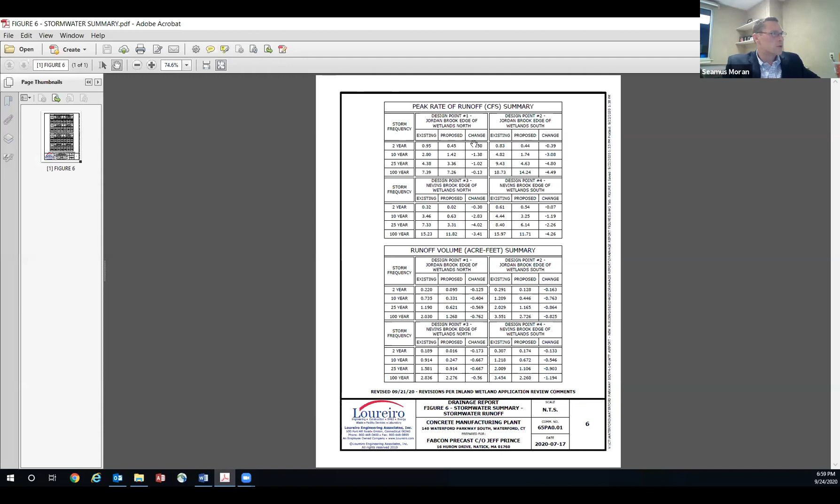All right, so I'm going to share my larger screen, so I will not be looking directly at the camera. Hopefully you guys can hear me and see me. So I'll share my screen now. Everybody see my screen, with hopefully the peak rates on it? Yep, okay. Again, it's just a summary. I probably mentioned this a month and a half ago. I just want to bring it to everybody's attention again.

So these are design point 1, design point 2, design point 3, and design point 4. Design point 1 is the Jordan Brook edge of wetlands on the north half of the site. Design point 2 is Jordan Brook edge of wetlands on the south half of the site. So design point 1 is at the midpoint of Jordan Brook. Design point 2 is at the southern end of Jordan Brook. So these numbers, as you can see, existing and proposed.

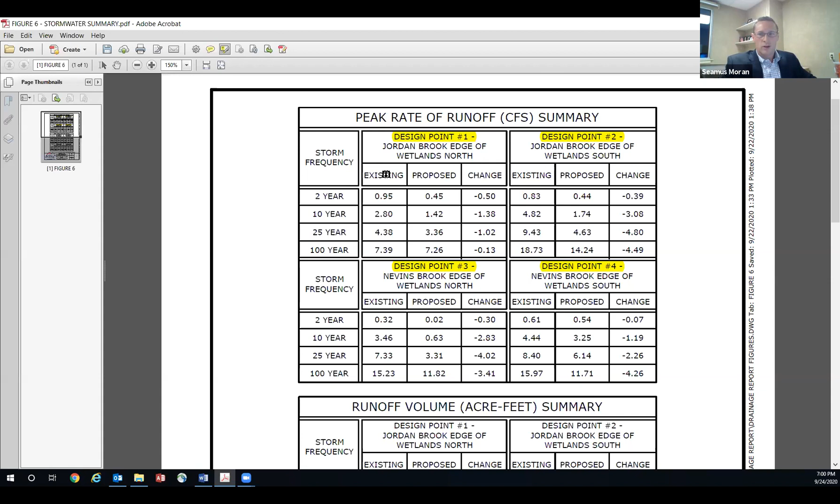I'm sorry? Double doors. It was like a backdraft move. This huge cloud. I'm sorry, I didn't catch that. Was that for me?

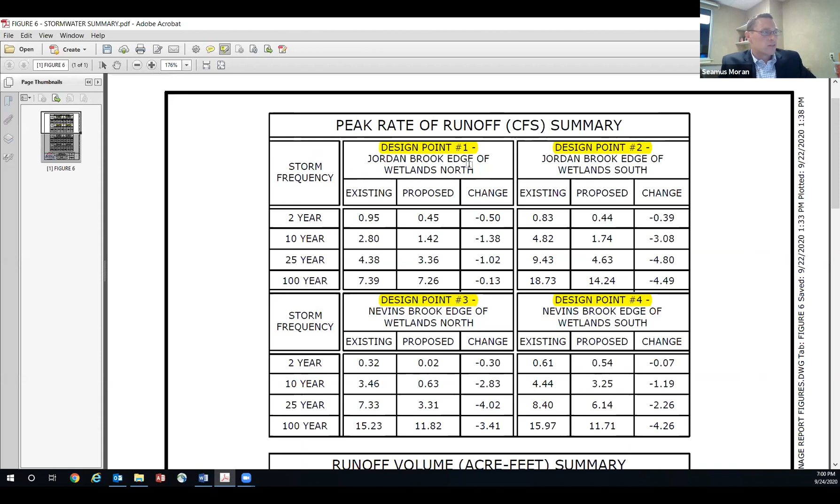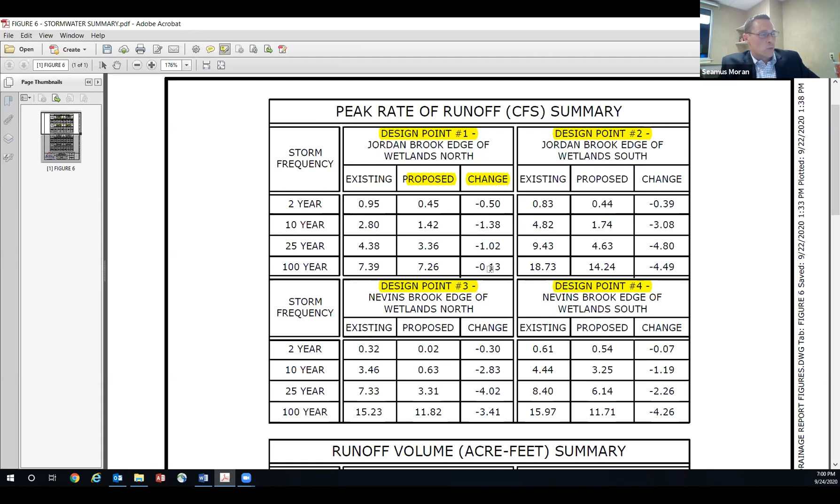Okay, all right, so if everybody can see this, I'll just quickly go over it. You can see the existing numbers here in the left column, proposed in the middle, and the change in the peak rates on the right-hand side of each column. So for the storm events, at design point 1, there's a minor reduction for all of them. At design point 2, it's a reduction for all storms 2 through 100. Design point 3, same thing. Design point 4, reductions at the 2 through 100-year storm events.

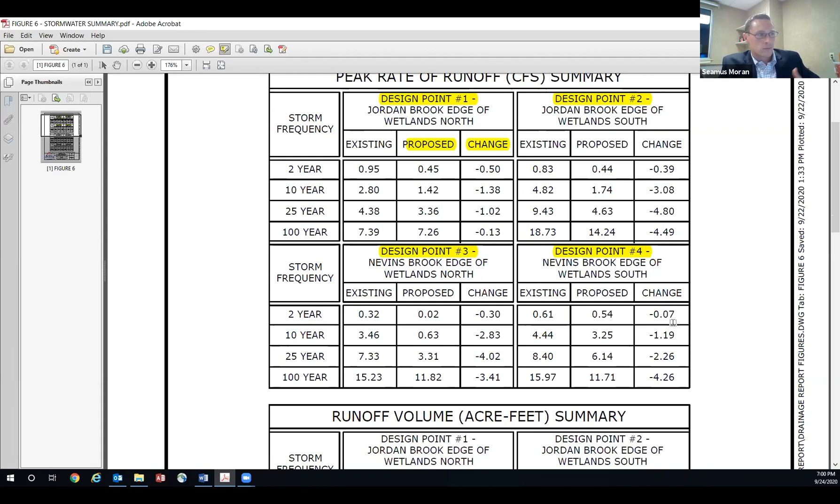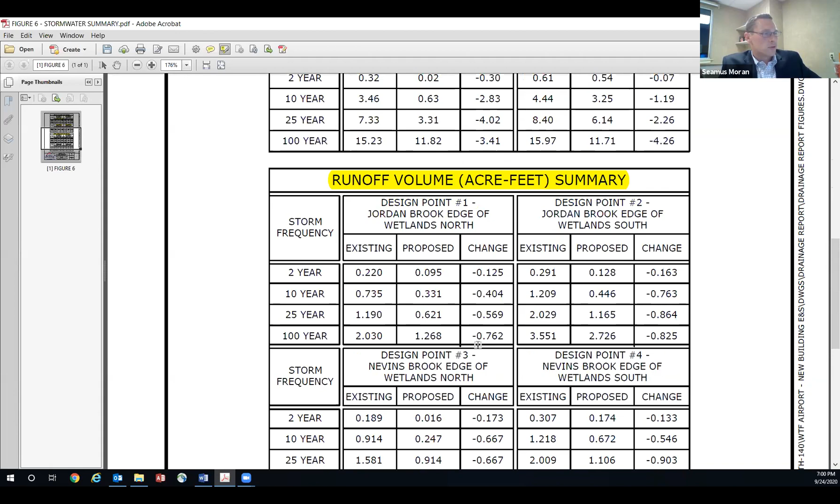As well, this is the volume of runoff at each of the design points. This is in acre feet. It looks like a small number, but it's a pretty substantial number when you multiply it by 43,000 square feet. So again, in order of magnitude, at design point 1, the proposed condition is only 1.3 versus the existing at 2. So we're looking at a little bit more than a 50% reduction.

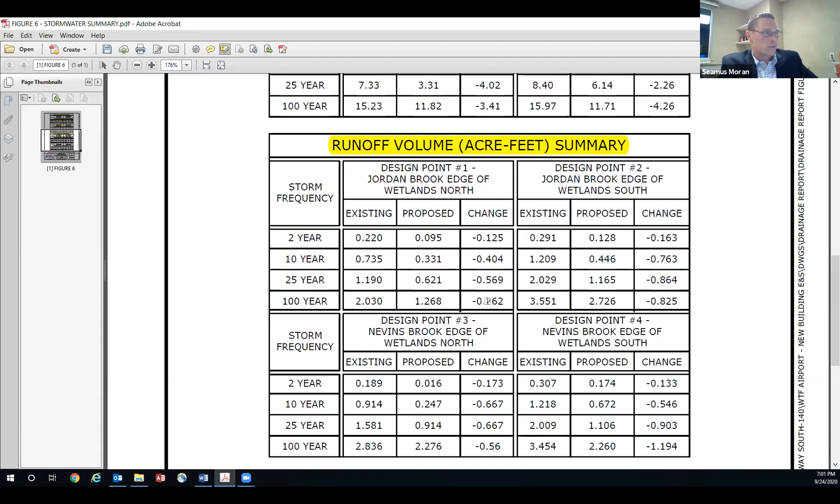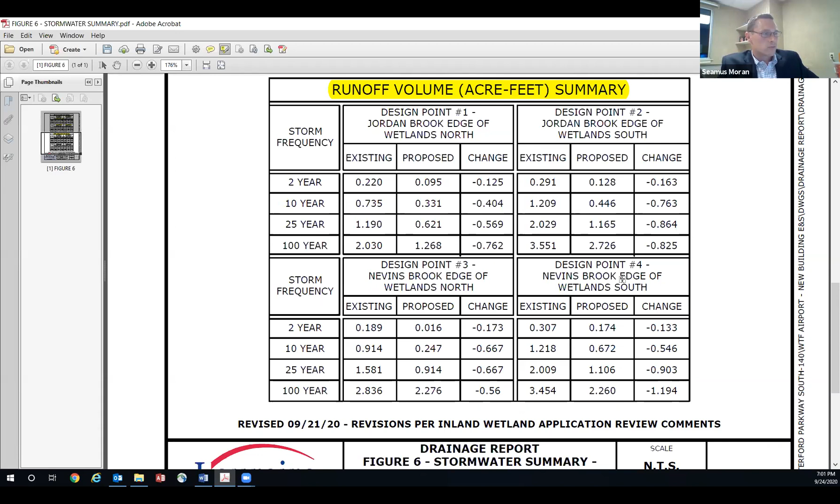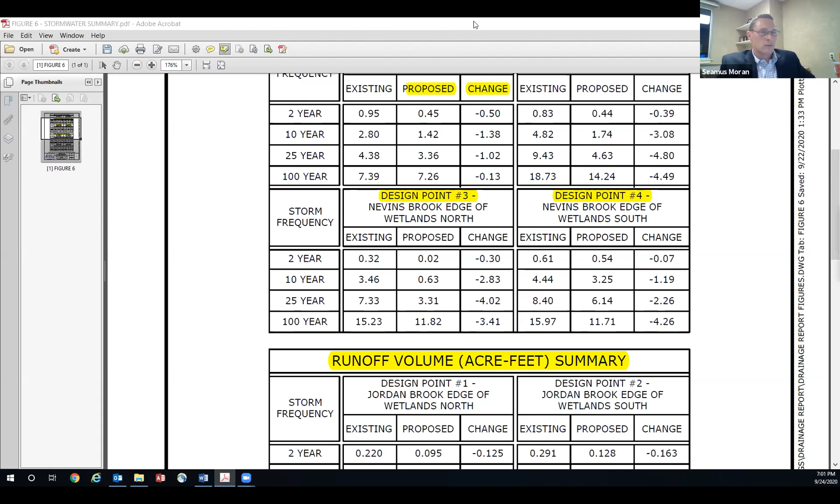And as it goes, almost 0.8 acre feet for design point 2, 0.6 at design point 3, and 1.2 for design point 4. So significant reductions across the board for peak rates and for volumes, and I just wanted to bring that up again. So lastly, we do have that video. I know we promised it. We finally have one. It shows how the gantry cranes unload a vehicle at one of the other sites. So let me bring that up now.

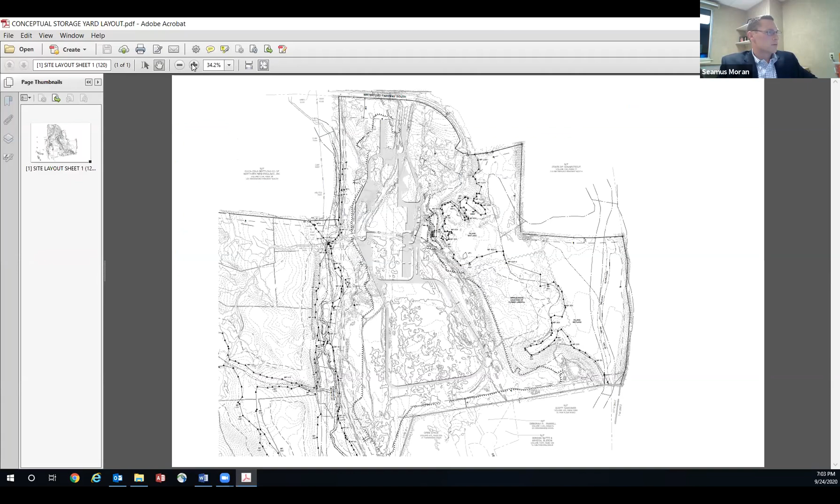So if you zoom into the storage yard, this is how we also developed the amount of impervious coverage based on this layout. Each of the darker rows here are concrete panels. The gantry cranes move in and out of the paths next to them. There's a little strip between each of the panels where one of the wheels of the gantry crane is.

And then as you can see, the offline forebays are in line with the panels based on the layout. There's access to the offline sediment forebays on each side. This is where the gantry crane path is.

And we've added a fence around these as well to prevent access from any panels or storage of anything in the offline forebays. So they can access these forebays for cleaning or maintenance, and there's a fence around it to prevent any usage other than stormwater. So this was submitted today, and it will be included in the record now, but I wanted to give everybody an idea of what the layout would look like.

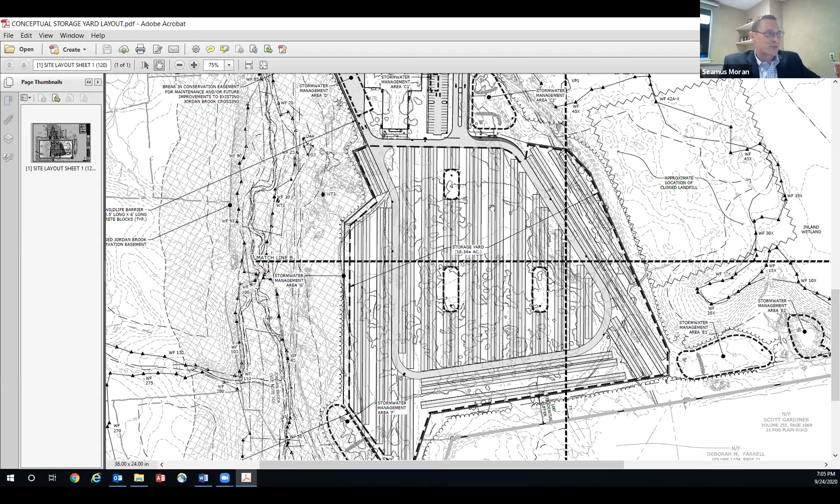Again, this is schematic. They like to do them in rows like this. It's easier for the gantry cranes. I highly doubt this is exactly the layout that they're going to use, but it's as close as we can guess right now. Seamus, how many cranes? Or Jeff? 3. 3 cranes. 3? 3 gantry cranes.

Now, it would most likely be a rare circumstance when the interior yard was utilized, I would think, correct? It's only utilized for the staging of one project at a time, I guess is the easiest way to put it. But if we're delivering to 2 projects, they're not going to be picking out of the whole entire yard. The yard might stage 10 projects at once. So they're going to be delivering out of one project at a time, usually, maybe two.

Okay. But I guess it would be rare to have that whole yard filled with panels as a general rule, or not uncommon? I'm not going to say that it's uncommon. I'm going to say that that yard could vary from half empty to completely full. It depends on the production rate. It depends on if a client is not ready to receive panels, then the yard fills up with that job. Okay, understood. So the yard can get overfilled if there's two clients that don't need their panels on time because the steel erector is late, whatever the reason might be. All right, thank you.

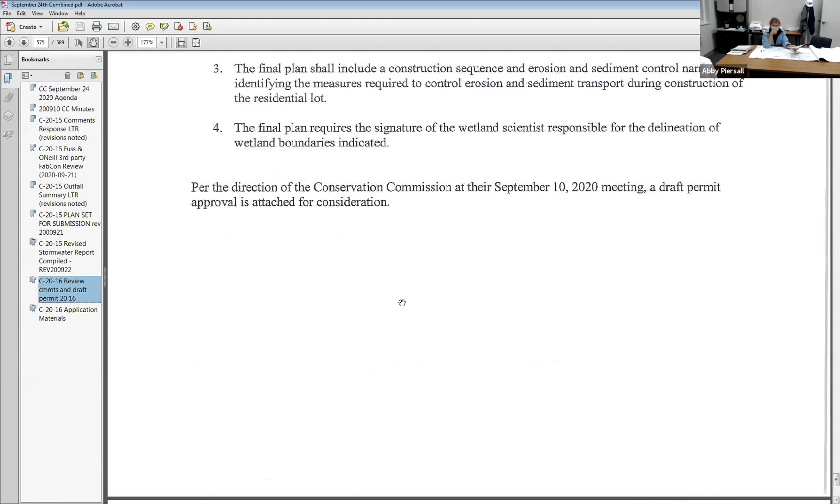Yeah, Katrina's going to bring up my September 16th memorandum to you. It's coming right up. Just go to this picture. I think that's in it. So that's the overview, that's the whole property. The church is going to break off just at the south end of their parking lot and look to the south, the wooded area that's accessed by Granite Court.

So in that area, there were 9 wetlands identified, and 7 of them are isolated pockets. I had it marked up on one of the sheets there in green. You can see 5 of the pockets that are just below the elbow or the hook in Granite Court, and that's also where the proposed development is. The wetlands were monitored by James Cowan to see if they were being used as breeding areas by amphibians, which would render them what we call vernal pools.

And the 3 that I have highlighted in the southeast were found to contain egg masses of spotted salamanders, which is an obligate species that uses these vernal springtime wet areas to lay their eggs, and then the eggs hatch and the juveniles leave the pools when the pools dry up. Closest to the development, up in the left corner, those did not contain deep enough water for a prolonged enough period of time, and no egg masses were discovered there. And the long corridor on the east side is the intermittent stream that continues to drain off property.

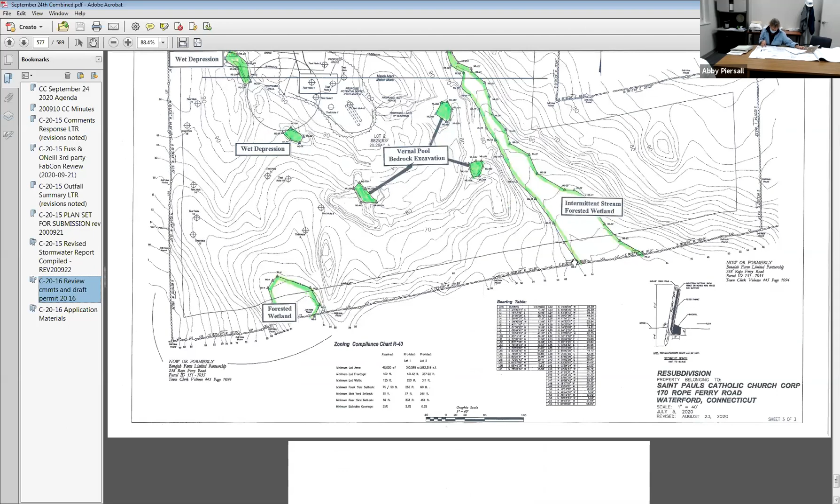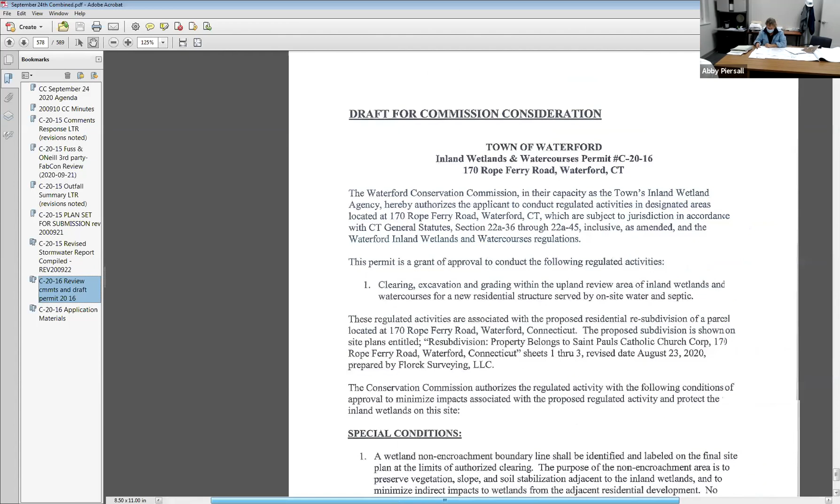So coming up, the next page or 2 is the draft permit. Yeah, can you blow that up? So what I have for special conditions are pretty much what we apply for 2, 3, 4 lot subdivisions, that we're going to identify what's called in our regulations a wetland non-encroachment boundary, which is a little more strict than the upland review area terminology.

It means it's notifying the owner that any work outside that boundary or within that boundary closer to the wetland requires review and potential approval by the Conservation Commission. That includes clearing, grading, filling, removing vegetation, requires authorization from the commission. And we have markers that are used to mark those boundaries.

Limits of clearing should be marked in the field and approved by your staff or an agent of the town prior to the start of site work. And to make sure that erosion and sediment control measures are installed at the limits of disturbance prior to the start of excavation. Those are the 4 special conditions. And then on page 3, the findings.

For the summary ruling in accordance with the Waterford Inland Wetlands and Watercourses regulation: one, that a wetland non-encroachment area is identified, upgradient of the wetland boundary to maintain a vegetated buffer, which will stabilize slopes, soils, filter runoff, and minimize impacts of the activity on wetland function, value, and water quality. And 2, strict adherence to the terms and conditions of the permit will protect the quality of inland wetlands and surface water on the property.

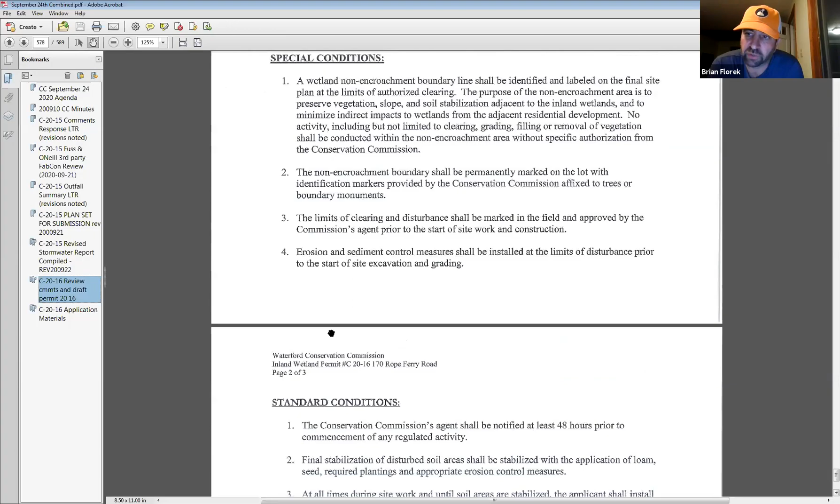Yeah, I can certainly speak to that. There was a residential house there that went into foreclosure, and that's where the garbage originated from. And I believe the zoning officer is fining the bank that now holds the note to that property on a daily basis. So is any of that on the property in question? It very well could be to the east. If Katrina could move her hand a little bit, just to that easterly line there, right where her hand is. There may be some there, but that's from the bank owned property. It's not from the church.

I just want to clarify that the town is working with the bank right now to try to get them to voluntarily clean that up. The debris is on the church property. So if there are any fines, they would be waged against the property owner. The town is trying to avoid that and get cooperation. This is a zoning enforcement action. Okay. Any other questions?